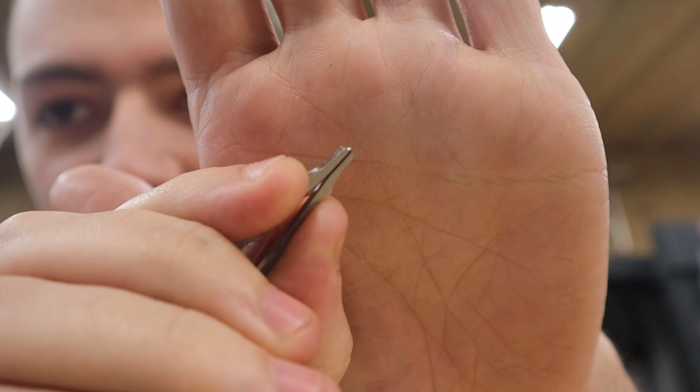A video or two back, maybe two videos back, I talked about how I don't have an oven, so I can't make blades. So in the meantime, I've come up with another project, and they're called tweezers. I know you know what tweezers are, but here is where I'm currently at with the tweezers. Yes, they're literally tweezers. See? Aren't they so cool? So, yeah, that's my tweezers.

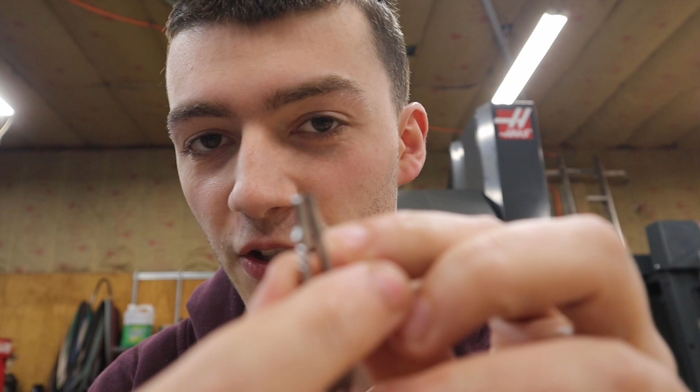I might change this back area a little bit, but what we're going to go over today is the thing that I don't know if I can do, but we're going to try. This is a 3D printed cap for them. So I was like, okay, I like this tweezer. I kind of like the size. It seems to work pretty good. But there's one problem with it that needs to be addressed. You can't put it into things without the jaws wanting to scrape or cut things. They're very sharp. I made them sharp on purpose because, you know, tweezers.

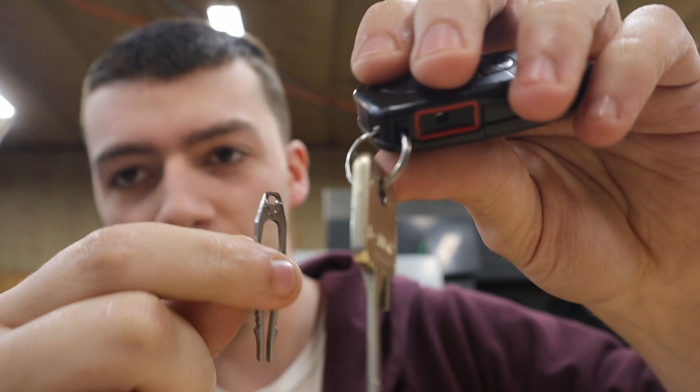So what I was thinking was, if I made a cap for it, then I could remove the keyring hole. So this is a 1/8 hole, basically, and it goes on like keys, like that. So if I could remove that, then I could use the back area for maybe a prying section, or right now it's sized for a flathead screwdriver, which I think is pretty cool. But then I can move the keyring hole to the cap.

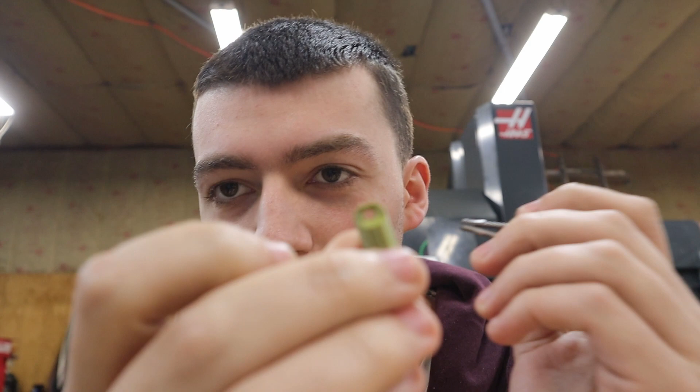So basically the way it's going to work is it snaps in, and the way I want it to work is you can snap it in with one hand and pull it out with one hand. Well, of course it's one hand. What I'm saying is you don't need to press it to get it into its cap, basically. So that's why this geometry on here is kind of weird. Like a duck, kind of. Looks like a duck.

Quack. So, anyways, it goes in like this, it snaps in, and then you can pull it like that, and it's easy, and it needs to be strong enough to be, I don't know, flailed? Tossed around, so it doesn't come off your key ring no matter what crazy activities you find yourself getting into. Yeah, there is a hole in the titanium tweezer market, I assure you. There's plenty of pry bars out there, but there are not enough tweezers, so that is what we're doing.

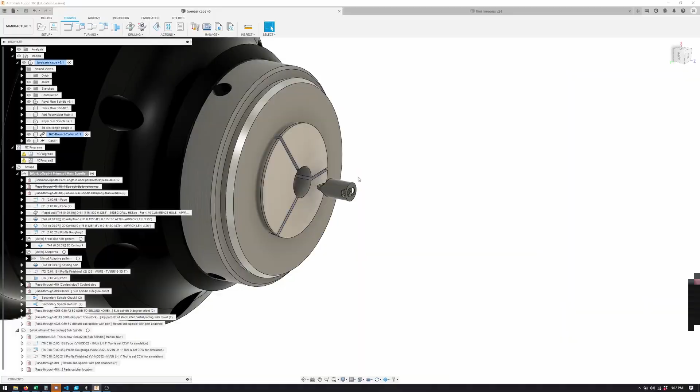Anyways, what we're doing is we're actually going to make the cap. I'm going to try to make this cap on the lathe. I've designed it in a way that I can use the live tools to cut the front pocket and the side pockets. And I just spent a long time programming in Fusion, a preliminary program, if you will, so we'll go over that. So we're gonna do lathe work, I guess. Alright, here we are. Here is the cap. It is very tiny. It's hard to describe how tiny it is, but this is a 16C collet for reference.

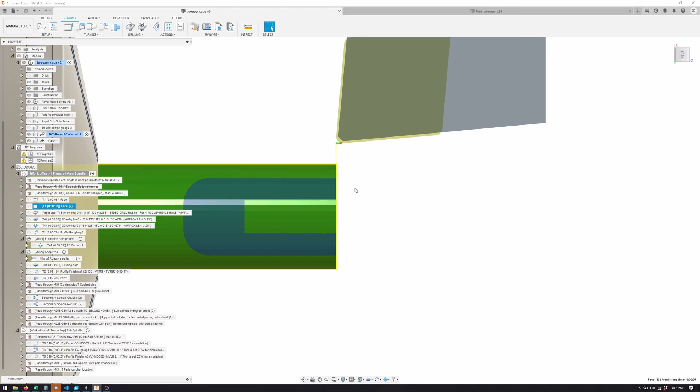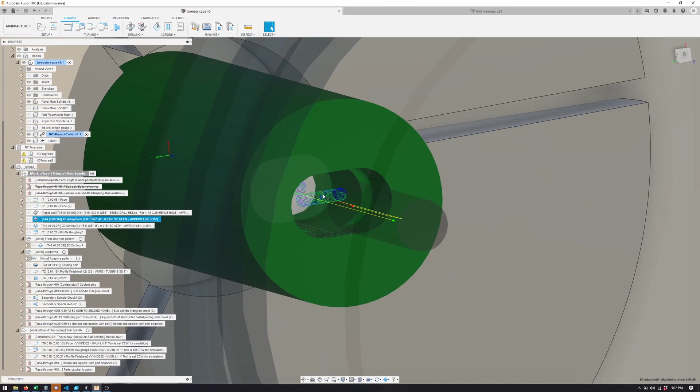So in our main setup, we have it set up as a spun profile. We're gonna do this interesting face where it comes down to the center and then retracts, still touching the part. That should give us a really nice finish. Then we're gonna drill a clearance hole or pilot hole for our 1/8 cutter to go into the pocket. There's this down pocket and this upper pocket, but it's going to do the upper pocket first, and then the down pocket, so that'll give us some chip evacuation type geometry. Then it's just going to contour finish both those pockets.

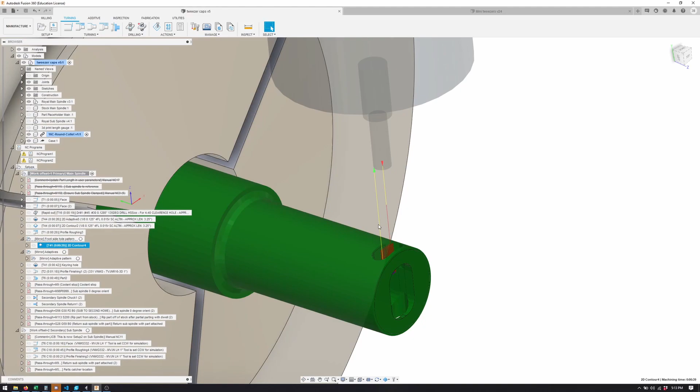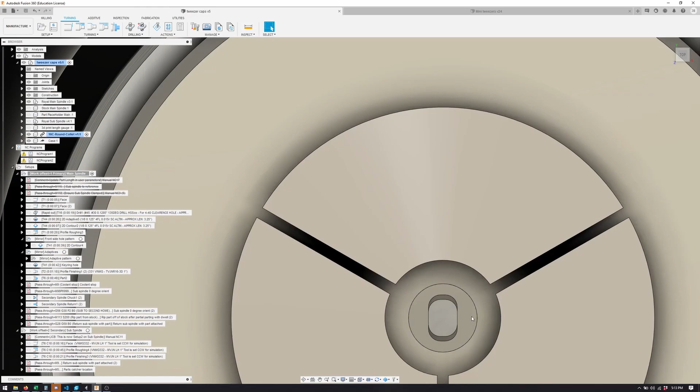Then we're going to rough out most of the side. Then we're going to use a 5/64 end mill, I think is the size, to do the actual pockets on the side. The pockets on the side right here are where the tweezers snap into, so they snap into these side pockets. Pretty self-explanatory. So the cool thing is it's orientated in a way you can't fit the tweezers in this way. It only goes in up and down, so you can do it in the dark. Fantastic. Yeah, so that's that.

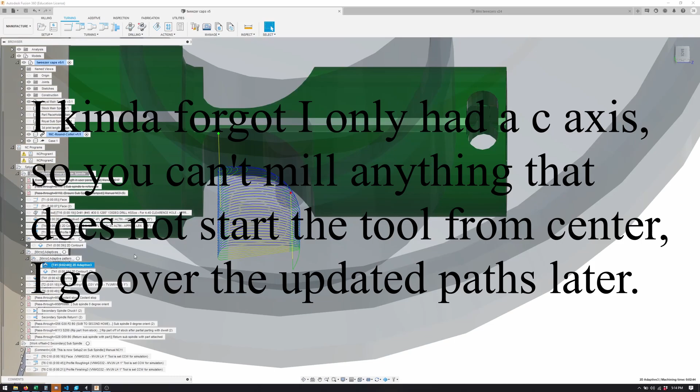Then I've been using patterns a lot lately, and they're very helpful. So we're going to adaptive the edges here. As you can see, like I said, I made it with the intention of making it on the lathe. So this is cut out of a round profile. So we're going to adaptive that, and then we're going to contour. Then I have it patterned.

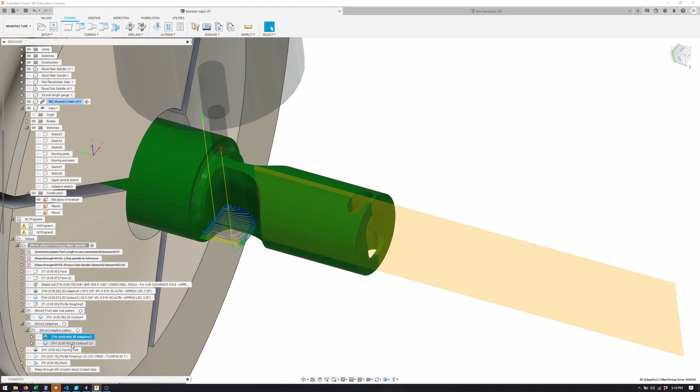So basically the way a pattern works is you can pattern it, and I just use some construction planes, which are right here. This is not that important, but if you don't know, you can do this. So here's a mid plane, so it's patterned against this mid plane to give us this two, and then what I did was patterned the pattern mirrored on that other mid plane that's this way. So what you're left with is actually 8 tool paths.

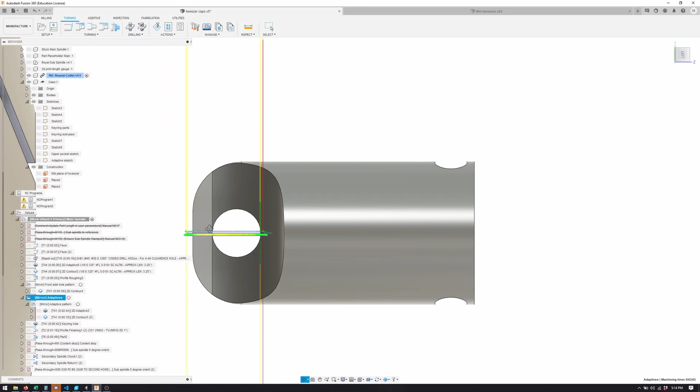So it's going to adaptive, and the reason they have a little bit of separation is because I'm not going center to center, I'm doing a little bit of an overlap, and I think that will make the end mill a little bit happier. I don't know.

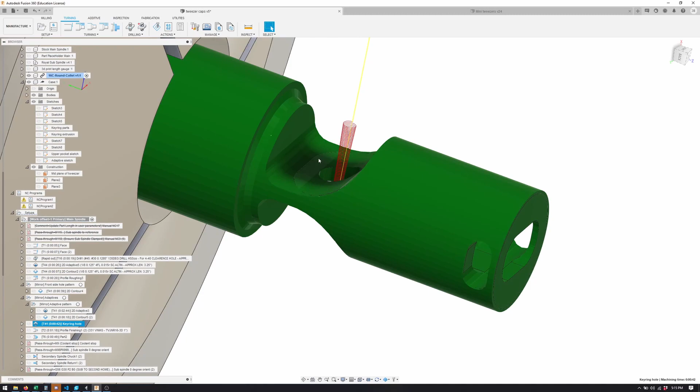Then we're going to come in and do the key ring with an adaptive. And the cool thing about adaptive is you can use this thing called a ramp taper angle, and you can actually set the ramp to taper in like this. So you notice that this ramp has a taper, it's a funnel. So that's what I'm doing. I might end up changing it to just start ramping down here. Obviously this material is not here, but this is a prototype, if you will.

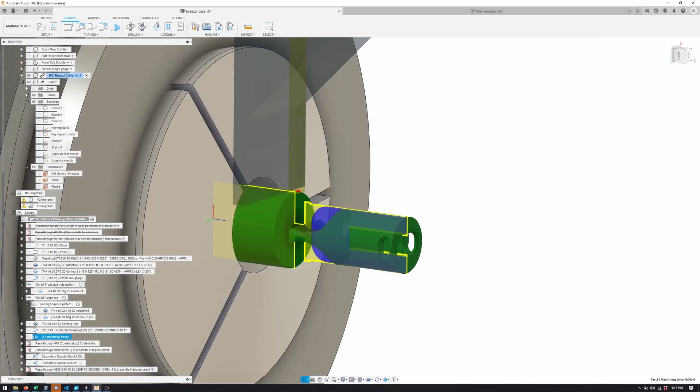Then we're going to finish the outside profile with a VNMG 331, a very tiny radius tool. And then this is where things get a little weird. So I'm going to try to sub-transfer this while they're synchronized and spinning, and part it off while it's synchronized and spinning. And I have not done that. And I'm going to have to get the other parting blade out, and I'm not sure how well this is going to work, but

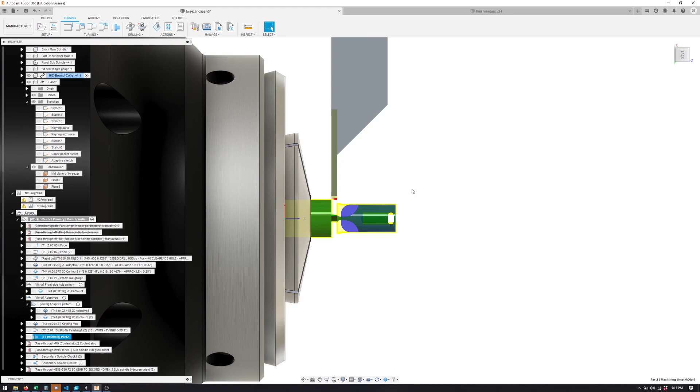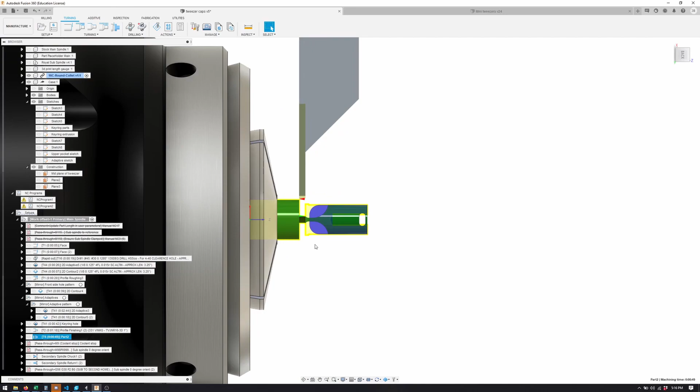we will see. I'm looking here, and I know the subspindle jaws are pretty tall. They're like here. And I want to grab on like here, so you can already see we're going to hit our parting blade. Or I have a grooving tool in there right now, which you can use as a parting blade. But we will check that out after we get through this very long first live tool-ish process.

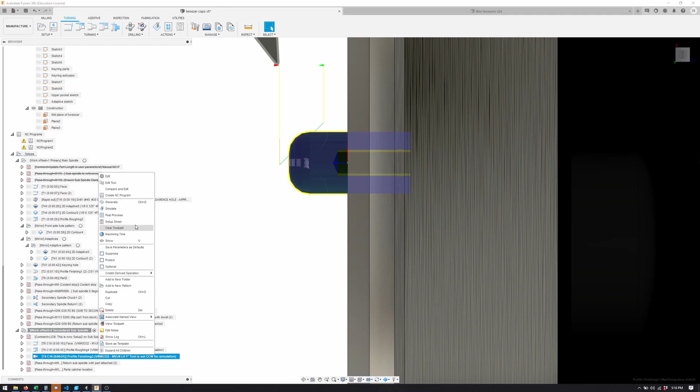Then, after all that, it's in the sub. Imagine it's already sitting in the sub, and what's left is we're going to face, and then we're going to smooth up that area, and then, this is kind of hard to visualize, but it's going to do this, and just clean up that final face. And what we'll be left with is actually this. It's kind of an interrupted cut. Terrible for the cutter, but that's just how it's going to be.

We'll be left with, hopefully, a done part, and it'll drop in the sub spindle, the sub catcher.

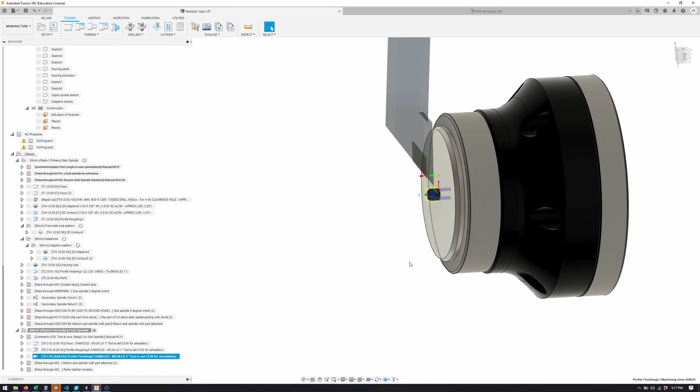And we will make millions of dollars, and I can finally buy that Tesla I've always wanted. Probably not going to happen. Alright, back to the real world.

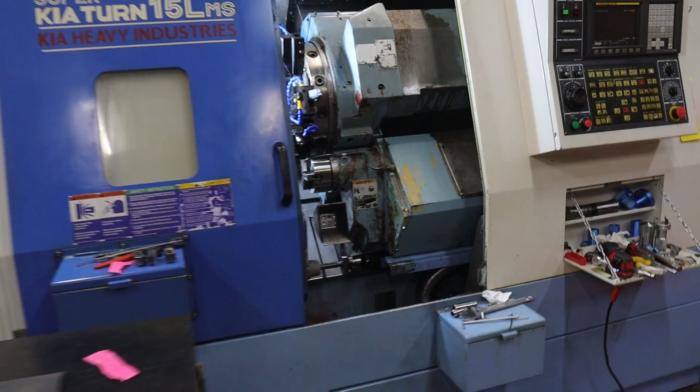It's been a couple days. I think it'd be nice to be able to transfer and finish the back face of these caps. So I'm over here trying to figure out our clearances. As you can see, this machine doesn't like to do small parts. I can't imagine why. So here's the issue.

So you got this gap between here and the front jaws of the subspindle that is basically 1 3/4 inches, and when you think about the stick out of the part by the time you get down to the final dimension, it's a really far stick out for this. So I'm thinking, if you can shorten the distance, obviously that gives you a lot better surface finish and tool life, and it's just better long term.

So the biggest issue right now is the subspindle jaw can contact this block. See this? That's what's stopping us from going any farther forward. So what I'm thinking is I'm going to take the part off blade tool holder and lop this corner off and get that out of our way. That's my current plan. Because if I could stick the jaws basically this distance closer, I'd gain almost an entire inch, and that would really alleviate a lot of problems, I think.

See, my part off holder is kind of big, and it's also a 3/4 holder. It's not a full inch, so I have to use this shim right here to get it to work. But I think if I could lop this off and stick this a bunch out, and then stick this a bunch out, we would have a tight enough area to work with. So I'm probably going to take that out and burn it on the mill. I think this might work, but I'm not too sure. Guess we'll find out.

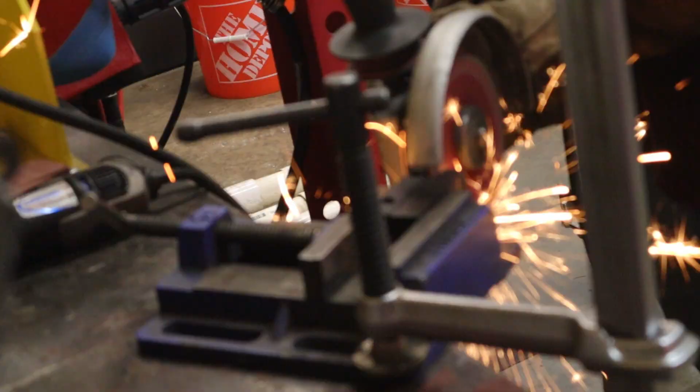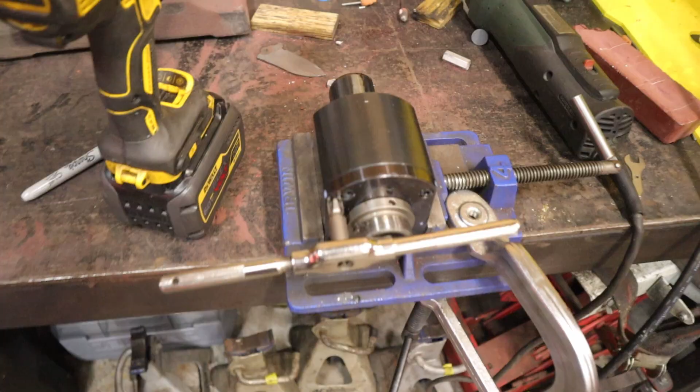Little intermission. I'm tapping an 8th NPT into this live tool holder because it only has a nozzle and the end mill is over here, and the nozzle can't reach the tip of the end mill. So this is what I'm going to do. I'm going to do this and then install a Loc-Line so we can actually face the coolant towards our end mill, because deep in that pocket there's no way to get the chips evacuated properly without the coolant being aimed right at the tip of the end mill. So that's what I'm doing.

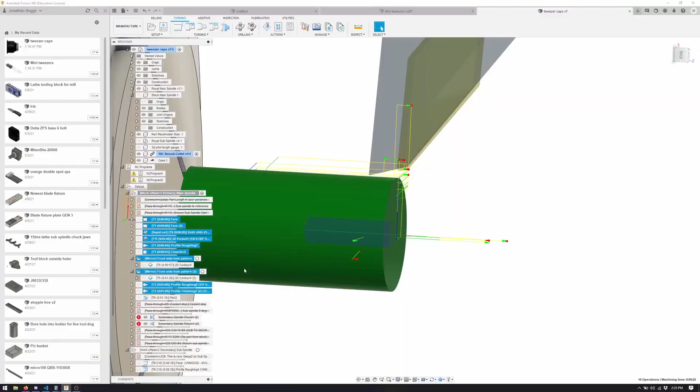Good times. Alright, ladies and gentlemen, let's talk cam. So here is our CAM. It's been a couple days, so I changed a couple things, but anyways, I have run one of these, not complete, but I do know that all the milling works, so that's a really good sign.

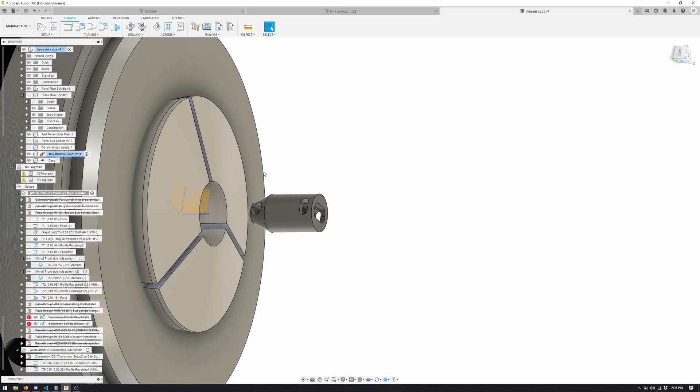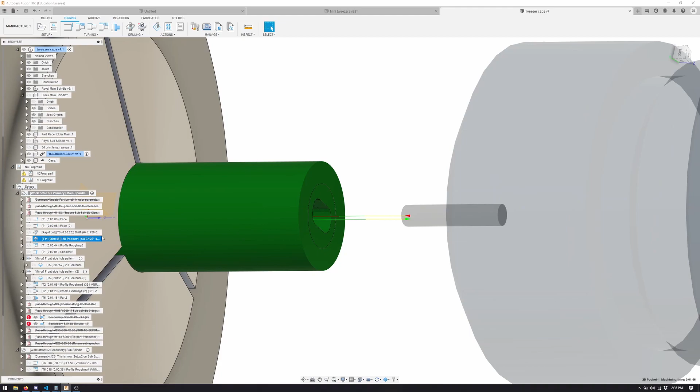So basically, we have our main spindle, obviously. First we're going to face, and then do that face thing where it basically retracts touching the part, gives us a nice surface finish. We're going to drill a clearance hole in the center of our tweezer pocket, if you will. And that's just a number 45 drill, I guess—or number 30 drill, sorry. Then we're going to come in and do a pocket, and the pocket is going to be done with a 1/8 end mill with a corner rad.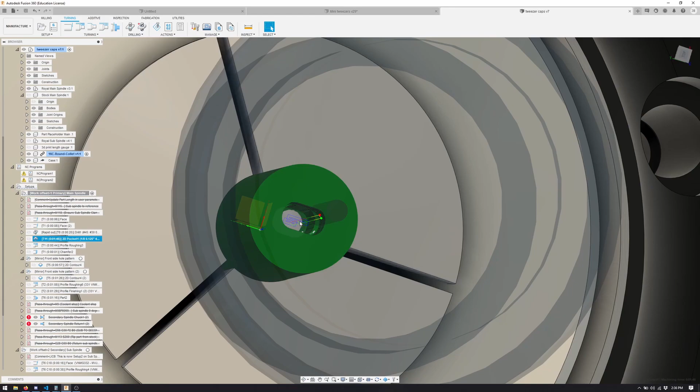So first, what we're going to do is actually pocket this top pocket, and that'll give us some chip evacuation hole for the second pocket. I think you get what I'm talking about. So it's going to do this first one, and then go down and do the bottom one. And I basically have a finishing pass built in there instead of doing a contour, because that eliminates the retract, and the C-axis on the lathe is a little weird about making really small moves.

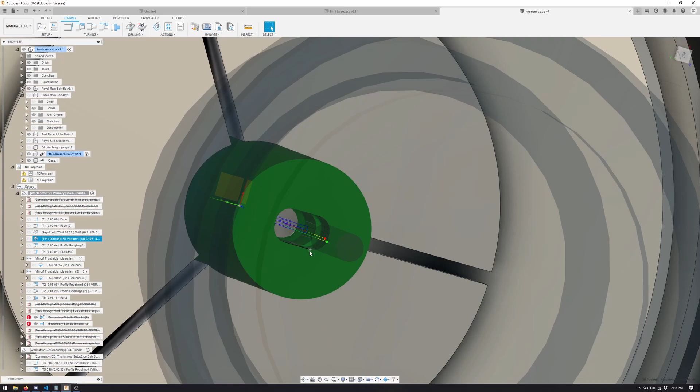Obviously the C-axis is synchronized with the X and Z, and so if the C-axis can't make it to the position in time as fast as X or Z can, it'll actually alarm the entire machine. So I found that doing it this way causes that not to happen.

So pocket, and then after that we're going to rough the outside. So we're actually going to go back to tool 1 up here, and the reason I didn't rough this first is to keep some rigidity in the stock. Might not be necessary—it is a small pocket with a small tool.

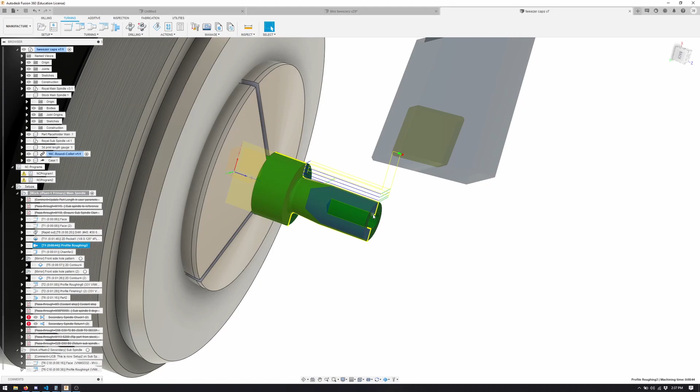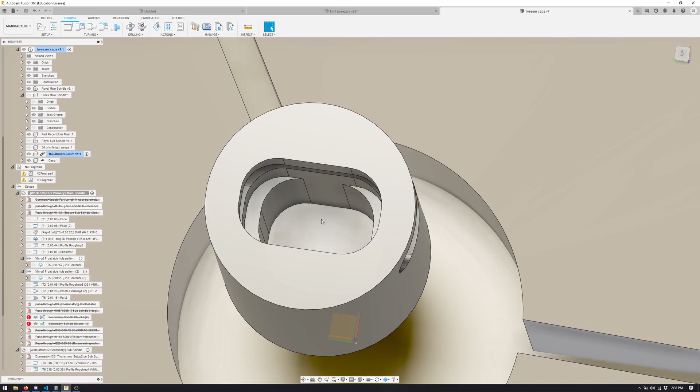Then a chamfer, so we're just going to put a fat chamfer on the end that's going to be adjusted. Also, I wanted to talk about how there's no chamfers on these ledges in here. So I may end up doing something with those, like right here and here. The nice thing about using a corner radius end mill is you can use the corner radius to actually make sort of like wannabe chamfers or fillets.

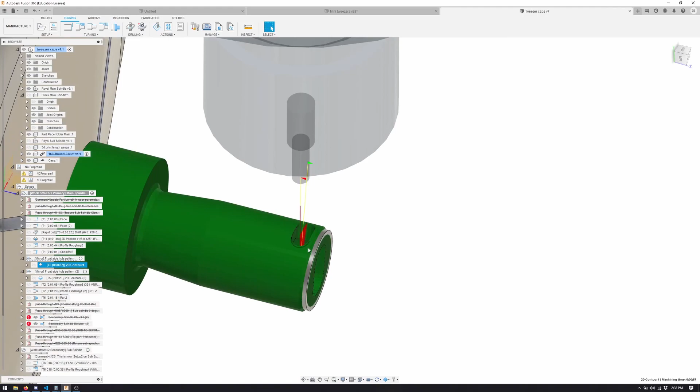Then we have a pattern, and it's a 2D contour, and that's how I get the side pocket. So we're going to radial mill this with a 5/64 end mill. Originally what I was doing was trying to mill these pockets without using a wrap toolpath like this.

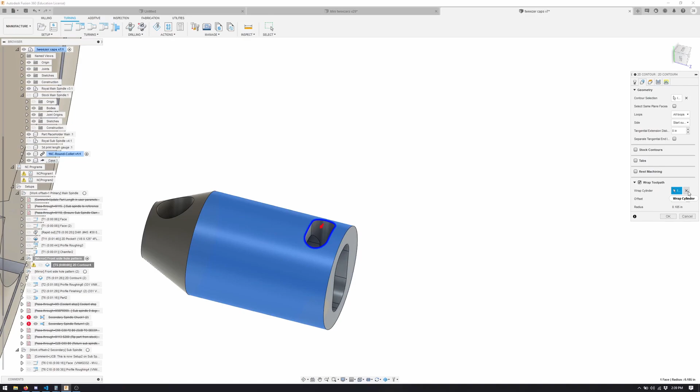Oh okay, well I had it. When you have wrap toolpath, you can't use tool orientation. So basically I would use tool orientation and stick the Z like center here and do a normal contour. But the C-axis doesn't put the right code out to actually mill the pocket, so you have to use this wrap feature, which is pretty cool, and I messed this up somehow.

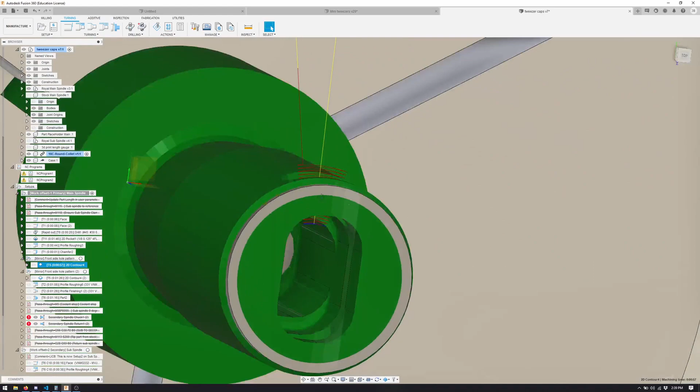So what you do is you just select the contour, and then the cylinder you want to wrap, which is this thing, and then you hit OK, and it'll actually generate proper code for the C-axis.

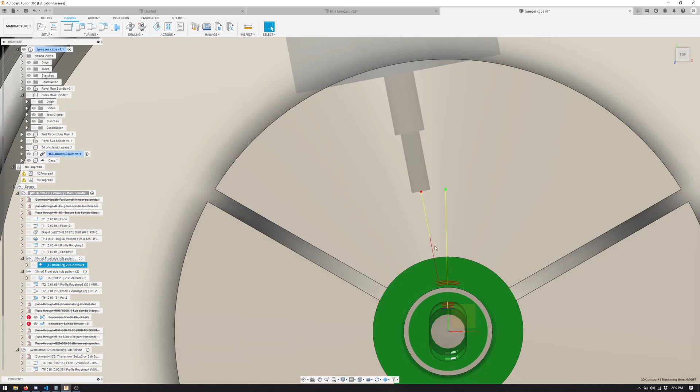So the thing with the C-axis is the radial tool always starts at the center of the part, so the code that's output needs to be aware that you can't have anything off center, and that's what it was doing before. You can see it starts center and then eventually leaves center, and it's basically going to interpolate this contour for us.

And I have it patterned, so we do both sides. I have proven this works. I did this yesterday, so that's good.

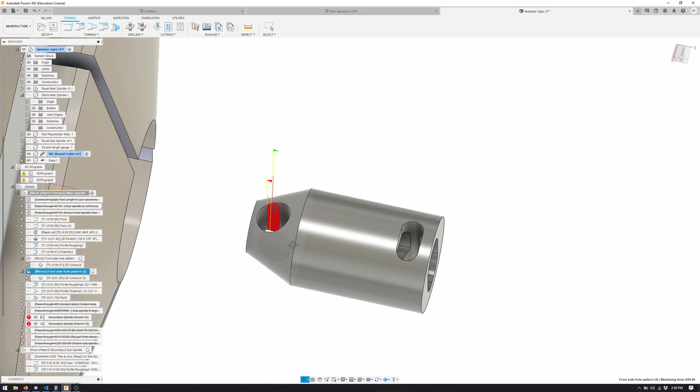Then we have the keyhole, for the key ring. Now this one's a little interesting. Notice the pocket almost folds into some sort of weird looking burrito.

Well, when it gets to the bottom here, it starts to make the lines of code. It starts to add a lot of digits to the end of like a C-axis or X-axis move, so it'll be a 5-digit move as opposed to just a tenth or whatever. So what's been happening is the FANUC controller's been erroring out, saying too many digits. That was the last issue I had last time I tried this.

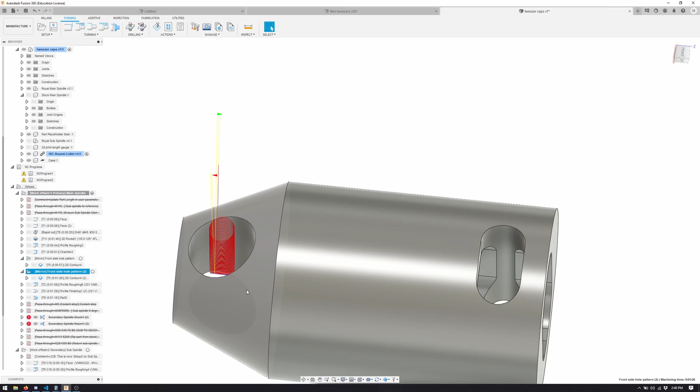So we're going to try this now, and hopefully it doesn't do that, but I'm sure there's a workaround. After that, we're going to rough out this section. I'm still working on this area, then obviously finish it, and we're going to stop. I'm not going to part it because I plan on transferring it synchronized and parting, so that'll be interesting. But that's where we're at.

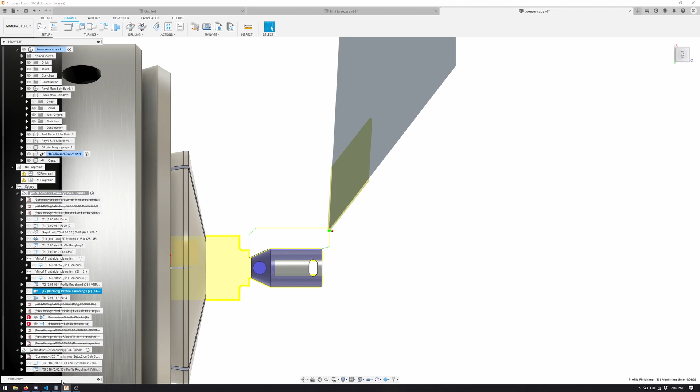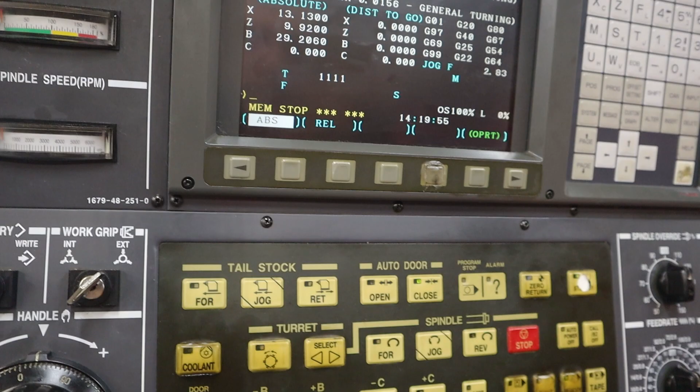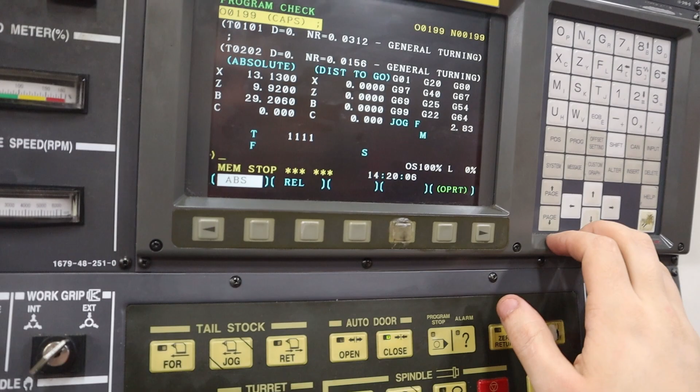It's very funny because the program's huge - I mean huge in 2004 memory sizes - so it's pretty funny because it takes absolutely forever to load into memory, like a good 3 minutes to load one of these programs. And you know, 2D Pocket's not exactly a hard-hitting program.

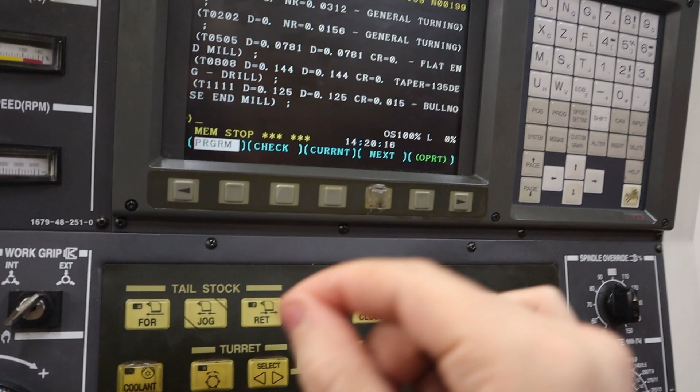So let's see, like I said, we're going to go all the way up to the point before we part, and then I need to figure out how to do all the sub-transfer stuff, so it's going to take me a couple hours, but this is where we're at so far.

So your typical face.

Put a nice surface on there, and then we can drill for a clearance hole.

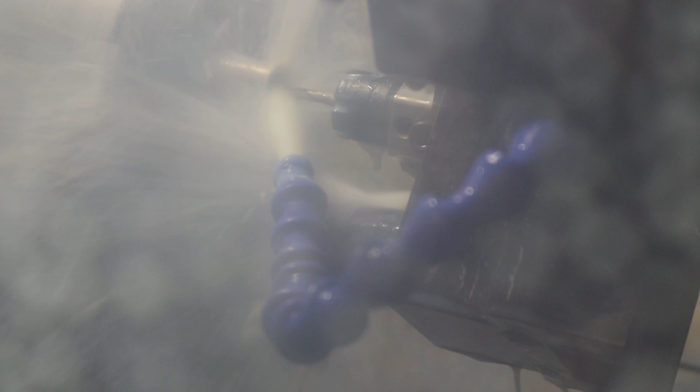Definitely hard to see what's going on, but I assure you there's... oh, there it is. Cool, and that gives us our clearance hole.

So then we're going to come in with the axial tool, which is the thing I just put the coolant nozzle on. Camera is having a very hard time focusing.

So yeah, you can see the C-axis has to move quite quick to keep up with the X and Z movements. So that's why it'll error out, I guess.

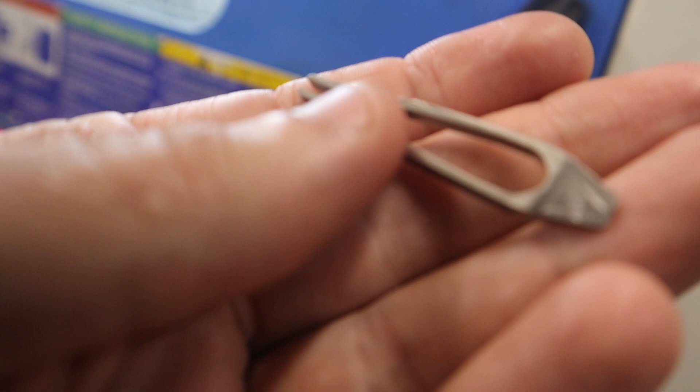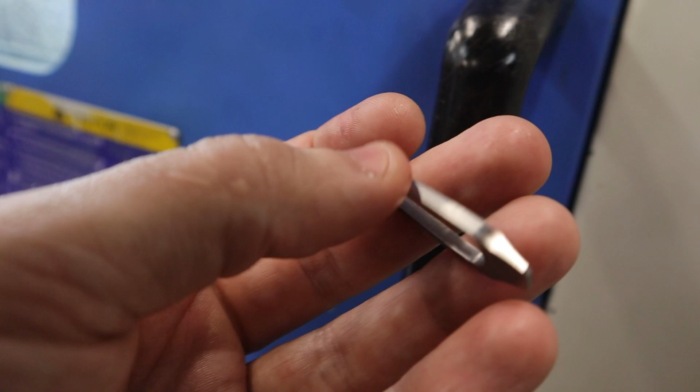Cool, here is the latest tweezer. See, I removed the circle on the back. Made it a nice Phillips 2, I think, or a flathead 2. And that way, these caps - that's now your key ring holder.

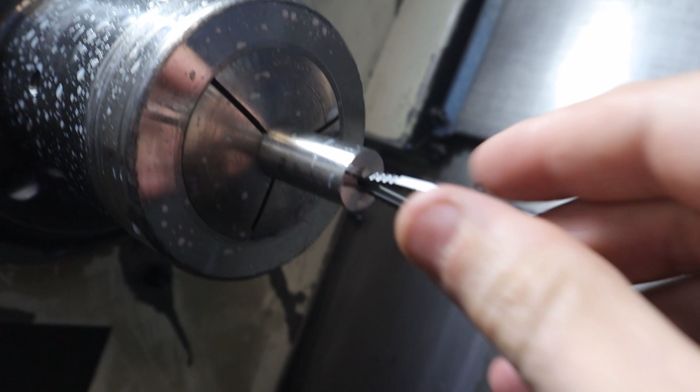So here's the hole. Fits good. It's obviously missing the side part, so yeah, that's what it's supposed to do. Like I said, I want to do a one-hand operation, so you don't need to worry about closing them to take the tweezer out.

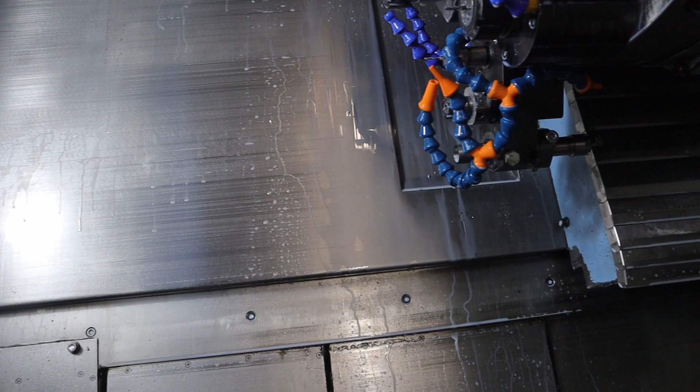Okay, so next we're going to do the outside roughing, and that'll take us down pretty close to final diameter, and then we'll do the contour, that wrap toolpath milling on the ends or on the sides.

I think you guys kind of understand what's going on here. It's just roughing out, so.

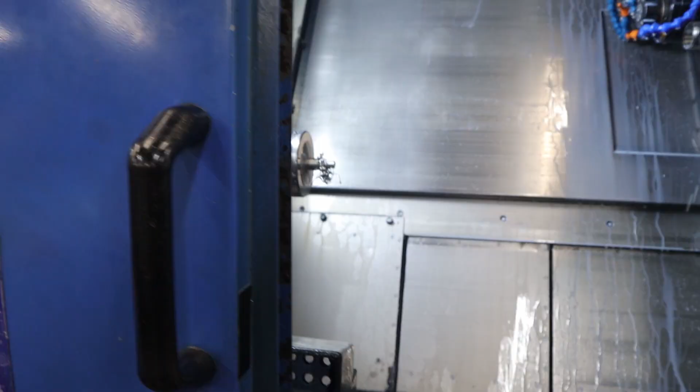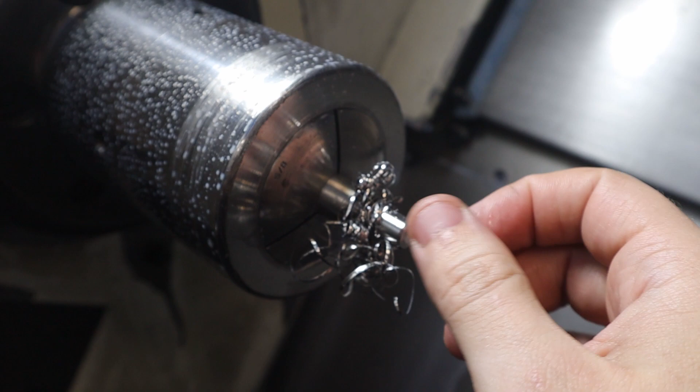Interesting enough, I left a nice bird's nest, so that's definitely something you gotta keep in mind, because what's gonna happen is this very small tool is gonna come in, and my guess is if it grabs this nice bird's nest - this is 17-4, it's not titanium yet, but this stuff's pretty strong - I would guess it could break the end mill, but I'll have to figure out something else for this.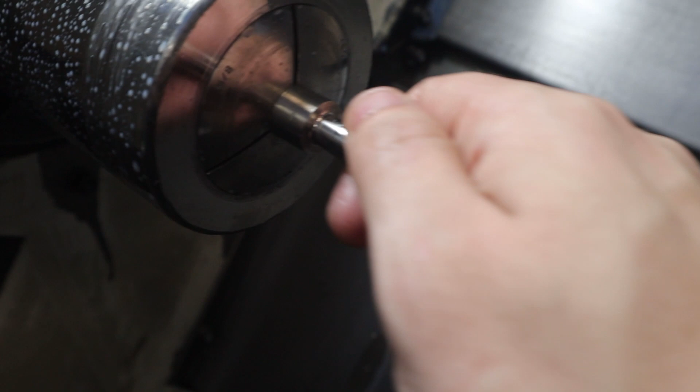So you can see we have the roughed out profile. This isn't hardened stainless, it's just annealed, so finish wise it's actually pretty good. There's a front chamfer. Cameras don't like shiny things, I guess, so you can kind of see it.

So now it's going to do that contour with that radial tool, which I think is actually really, really cool. But I'm biased.

So that's what wrap toolpath does. Pretty neat, right?

Now if you had a y-axis, you could do non-wrap toolpaths, but since this doesn't have a y-axis, everything has to start from center and be interpolated, like that, I guess that's the word. But yeah, that's why having a y-axis is pretty sweet, because you can do quite a few things, but work with what you got.

So it just finishes the first one, then it does a 180 and it'll do the second one.

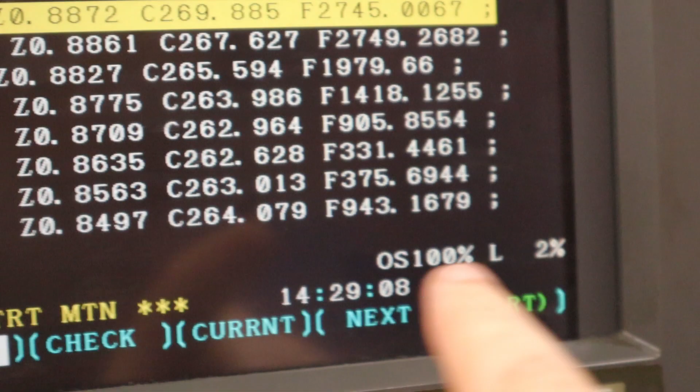Now this might not work, so it's going to do the key one now. And this one, unfortunately, what happens is it gets lower and lower in the hole. The C-axis has to move faster, I think anyways, and the numbers in the program, I guess, start to become really big. See how many digits there are? And I guess that causes the control to error out. It doesn't like having a bunch of digits.

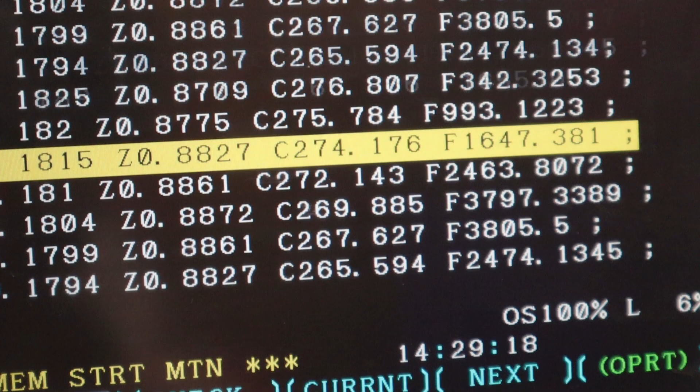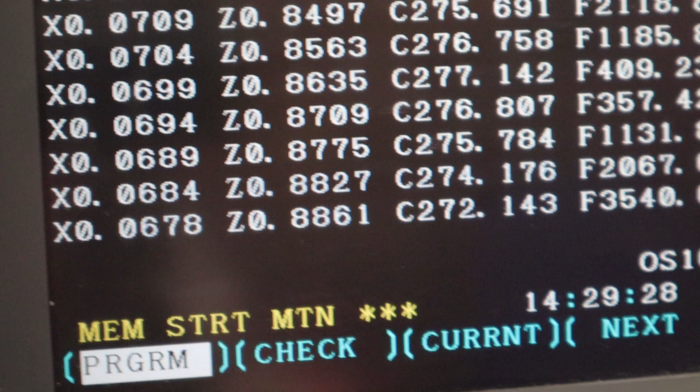Yeah, see, there you go. Excellent.

So I kind of need to have those holes, so I'm going to work on the fix for that and get back to you guys, but that is live milling, or radial milling on here.

Works pretty good, actually. Okay, so I worked on this problem for like the last 2.5 hours, but I finally got it working. So what I ended up doing was going into the post processor and changing the available decimal units it could use to just 3 as opposed to 4 when it was in inches mode. So that basically gave me enough room to have it not error out. So yeah, perfection.

Science. That was close. Alright, so we finally got the pockets done correctly.

Now it's going to rough or shape, which I don't think this is going to work that good, but I'm not too sure. So basically it's going to take this nice fine radius or relieved cutter and basically cut down into the corner.

Well, that sounds healthy. Yeah, so that was chatter. That's awesome. Yeah, it needs a little work.

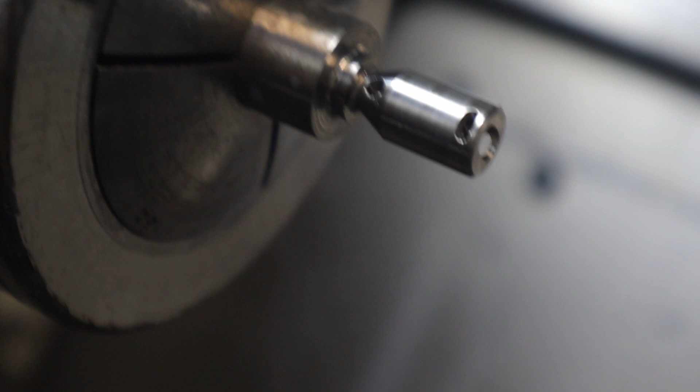Isn't that pretty? So now we need to figure out how to transfer and part off synchronized. That should be interesting, but I'm gonna leave you guys here.